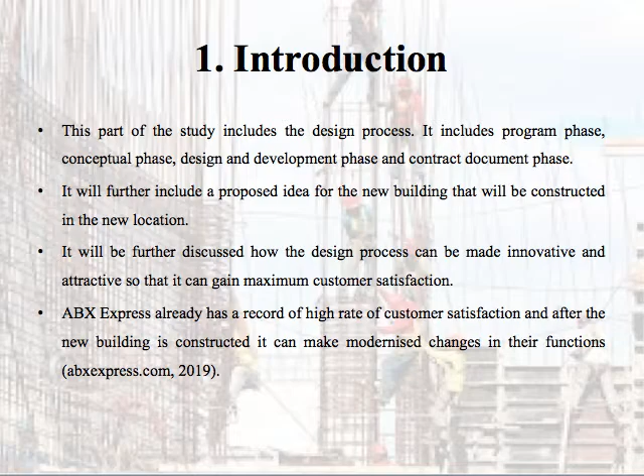Before we go further into details, I would like to introduce these slides. This part of the study includes the design process, which includes the program phase, conceptual phase, design and development phase, and contract document phase. It will further include a proposed idea for the new building that will be constructed in the new location, and discuss how the design process can be made innovative and attractive so that it can gain maximum customer satisfaction.

A literature review has been conducted on the design process, which includes the program phase, the schematic or conceptual phase, design development phase, contract document phase, construction phase, handover phase, and facility management phase.

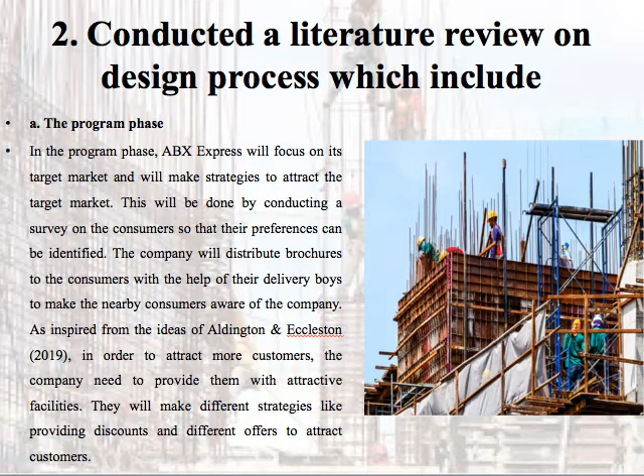In the program phase, the company will focus on its target market and will make strategies to attract the target market. This will be done by conducting a survey on the consumers so that their preferences can be identified.

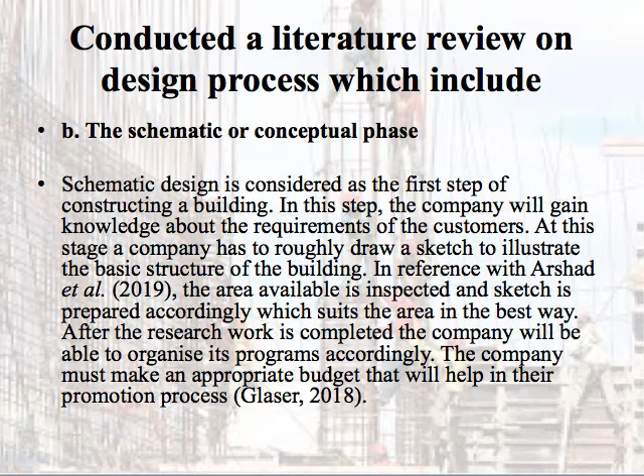In the schematic or conceptual phase, the schematic design is considered the first step of constructing a building. In this step, the company will gain knowledge about the requirements of the customers. At this stage, the company has to roughly draw or sketch to illustrate the basic structure of the building. The company will also make an appropriate budget that will help in their promotion process.

The design development phase includes a summarized result of schematic design and takes it one step further. In the design and development phase, the company should design their strategies in such a way that they can gain maximum numbers of sales and achieve high revenue. The company will also make a proper implementation of their budget so that they do not have cash flow problems. The designs are finalized from the available options for doors, windows, elevation, floors, and ceiling.

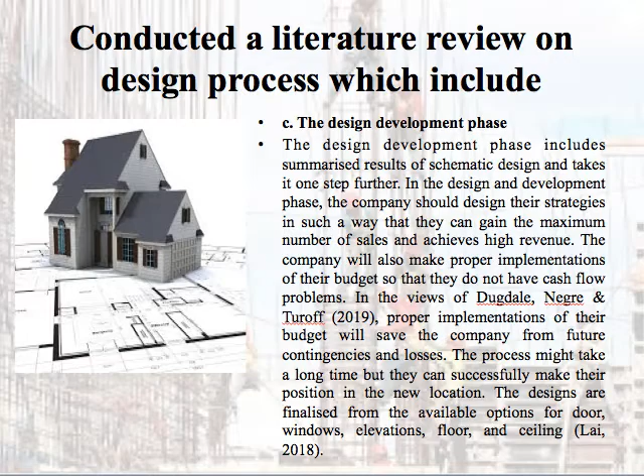In the contract document phase, once the company as well as the client are comfortable with the sketch or drawing of the building, a contract is prepared. A contract document needs to be prepared in order to mention the important points related to the building construction. The document contains a more detailed diagram of the building outline, mentioning each and every detail of the structure. The contract facilitates the process of taking permission from the Central Construction Office so that the business can commence with its plans.

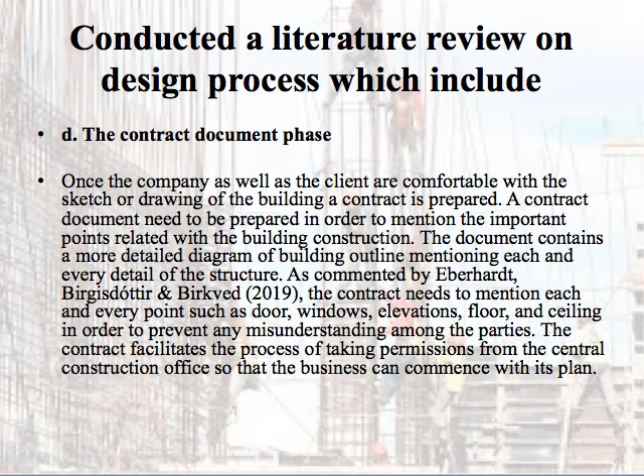The construction phase is the most important phase of the business, as the plans are implemented to produce the final output. At this stage, the building is constructed according to the proposed plan and procedures. Raw materials are purchased according to the estimated budgets and used in the process of construction.

The construction phase is the most time-consuming step and can take 2 to 4 years depending upon the size of the building. The construction of the building starts from the ground floor to the top floor, including each small unit such as windows and doors. Water connection and drainage systems are also arranged during the construction phase.

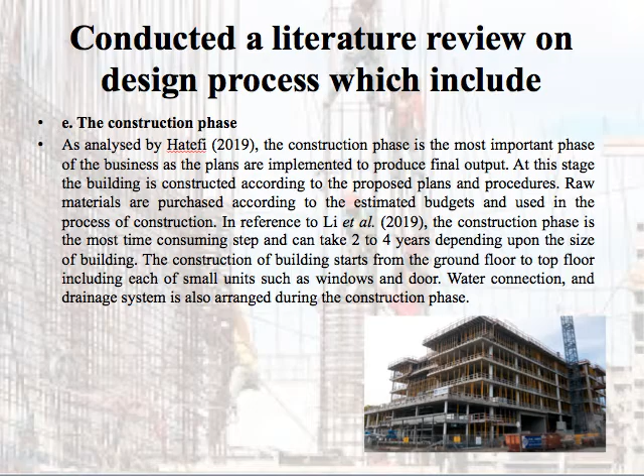The last phase of the process includes handing over the constructed building to the client with all necessary documents. A final inspection of the building is performed to understand whether there is any issue in the constructed building or not. A practical completion certificate is issued to the client, which means the building has been successfully completed.

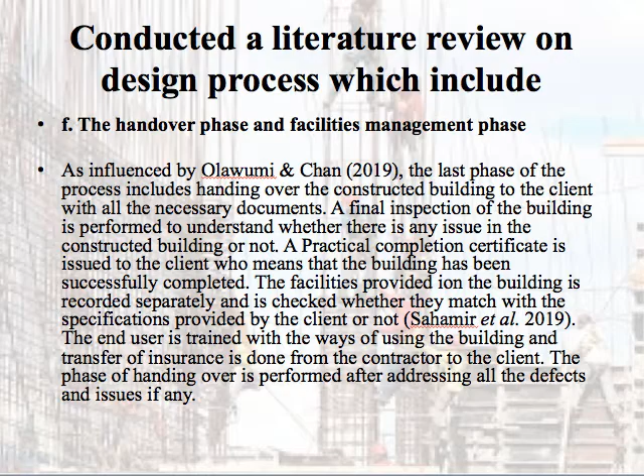The end user is trained in the ways of using the building, and transfer of insurance is done from the contractor to the client. The phase of handing over is performed after addressing all the defects and issues, if any.

The proposal of the new building. A proposal must be presented by the company mentioning the business process as well as the needs of both internal and external customers. The proposal of the new building consists of an administration office, service counter, and a warehouse.

An administration office is required for each and every business in order to create coordination among the activities performed in all branches, and it provides innovation, leadership, and social benefits. Moreover, an administration office helps in managing change, achieving targets, retaining talents, and managing public relations.

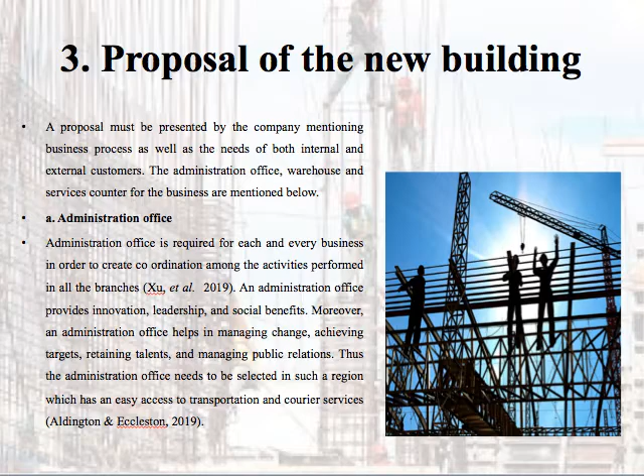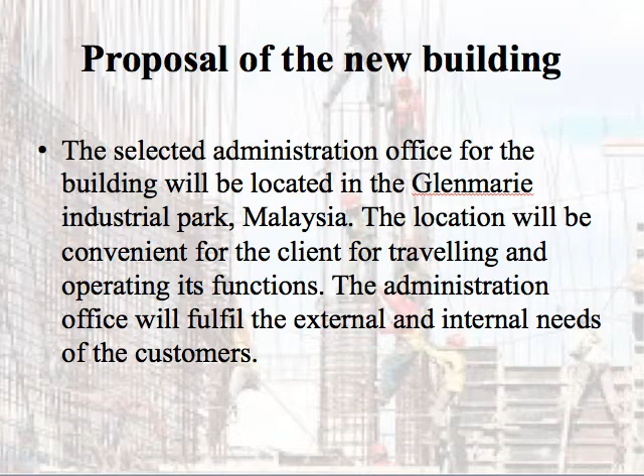Thus, the administration office needs to be selected in a region which has easy access to transportation and courier services. The selected administration office for the building will be located in the Glenmarie Industrial Park, Malaysia. The location will be convenient for the client for traveling and operation functions. The administration office will fulfill the external and internal needs of the customers.

Providing the client with a service counter is important to enhance the quality of business. The company needs to make provision for a service counter where the client can contact the company for any issue they face. The service counter will be located in the administration office, where the client can contact for any queries in relation to the service.

The service counter will also fulfill the external and internal needs of the customer, such as tracking services, customer queries, and other services. A warehouse is required by the business to store the inventory of the company.

The warehouse will be located with the administration office, which will help the business have accessibility. The warehouse plays an important role in managing the level of inventory a business possesses. Moreover, the warehouse provides tracking of inventories and customer service.

For instance, whether the product ordered by the customer has been delivered or not is checked. This indirectly increases the productivity of the company. The warehouse system can be enhanced with the help of ERP integration business process.

So what are the impacts of the new buildings? The new building creates an impact on the user in several ways, which includes a more attractive look and presentation. The new building reduces the effort of the customer, as they are getting courier services in their local region.

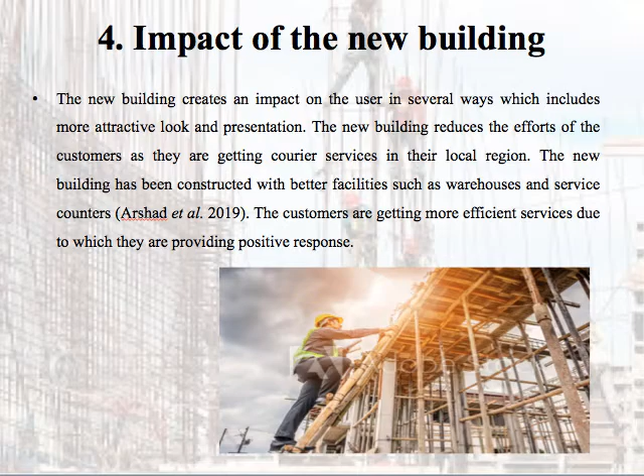The new building has been constructed with better facilities such as a warehouse and service counter. The customers are getting more efficient service, due to which they are providing a positive response.

In conclusion, all the phases of building construction have been discussed effectively step by step, mentioning the functions it involves. The administration office of the building has been selected in the Glenmarie Industrial Park, Malaysia. A contract document has been prepared mentioning the points of mutual understanding related to the construction.

The basis of selection is its accessibility to several facilities such as transportation. The building will also provide services such as a warehouse, counter services, and administration office to ease the effort of the customers. The new building also creates a positive impact by making the customer more presentable.